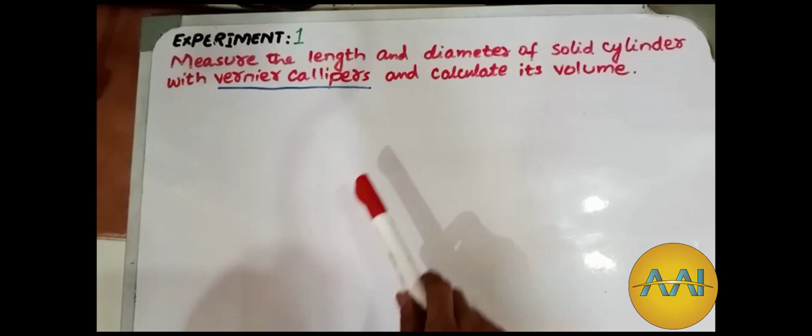First we'll have to learn how to read the scale. There are two scales on a Vernier caliper: one is the main scale and the other is the Vernier scale.

Before starting, we will see how to read the scale on the board, and then we will do it practically with the instrument. As I told you, the Vernier caliper has two scales: one is the main scale, as you have already seen on this board, and the other is the Vernier scale.

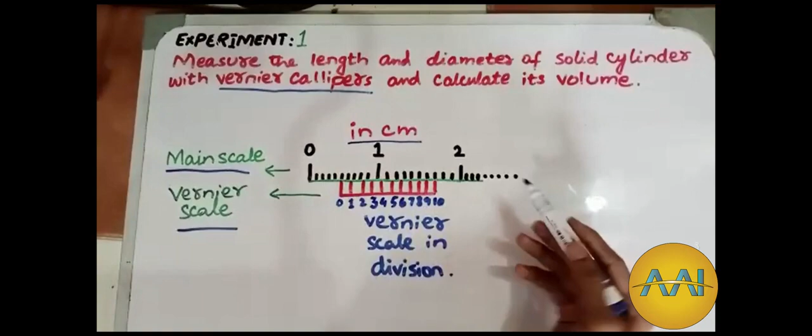The Vernier caliper has two scales. One is the main scale, which is in centimeters, the same scale as in your pencil pouch or geometry box. The main scale is always in centimeters, whereas the Vernier scale has no unit but is in divisions.

It has 10 divisions: 0, 1, 2, 3, 4, 5, 6, 7, 8, 9, 10. Not more than 10 in it.

So how to read this scale? I mean, how to read the main scale: 0, 0.1, 0.2, 0.3, 0.4, 0.5, 6, 7, 8, 9, and then 1. It continues the same way, like 1, 1.1, 1.2, and so on. In this way the scale continues.

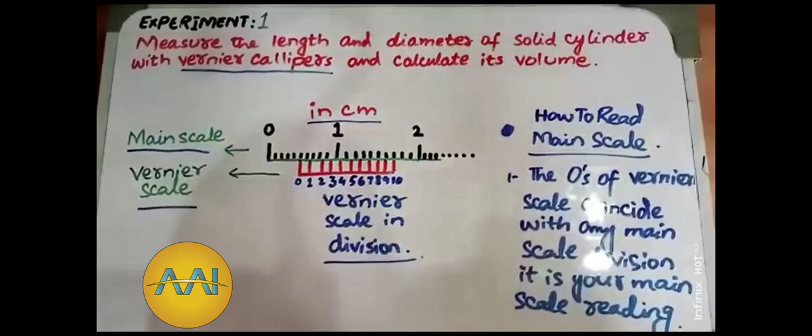So my point is, then how to read the main scale? The rule for reading the main scale is: where the zero of the Vernier scale coincides with any main scale division, that is your main scale reading. Let's see here what I am trying to make you understand.

This red zero, this is the Vernier scale, and the black marking represents the main scale reading. This is the Vernier scale and this is the main scale. The zero of the Vernier scale coincides with any division of the main scale.

This is a division. The one right after zero is 0.1 — this is called a division, this is called another division, and so on. So the zero of the Vernier scale coinciding with any division of the main scale gives you the main scale reading, which I am trying to make you understand.

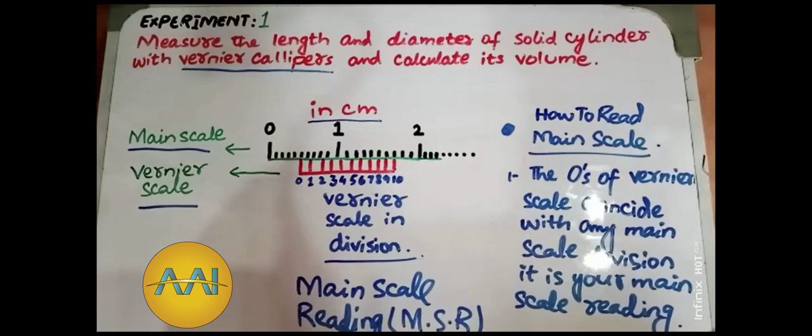So here, what is our main scale reading? Let's try to understand: 0, 0.1, 0.2, 0.3, 0.4, and 0.5, which means my main scale reading is 0.5. So my main scale reading, also represented by MSR, is 0.5 centimeter.

I hope you will understand. So here I have written for you again: main scale reading, also represented by MSR, we have found to be 0.5 centimeter. I hope you are all clear.

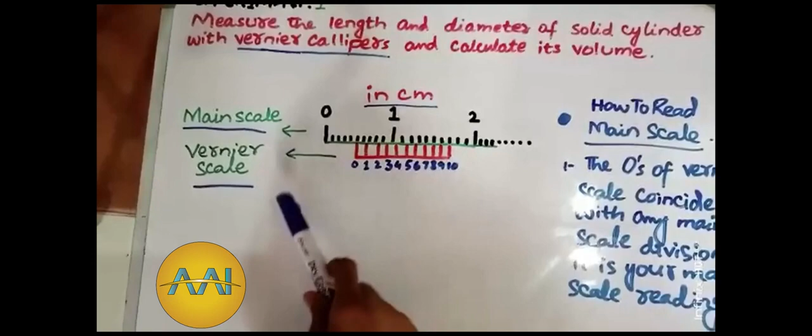So now it's time to read the Vernier scale. The rule of Vernier scale is that one division of the main scale and one division of the Vernier scale, like 0.5 of main scale and the 0 of Vernier scale, both coincide at the same time. That means the Vernier scale reading should be 0.

Let's understand by another example. If any division of main scale and any division of Vernier scale, except 0 and 10, coincide - if 0 coincides with one main scale division, and at the same time 10 also coincides with that main scale division. Look here, like 0.5 is coinciding with 0 of Vernier scale. At the same time, 1, 1.1, 2, 3, 4, 5, 6, 7 - 1.7 is coinciding with 10.

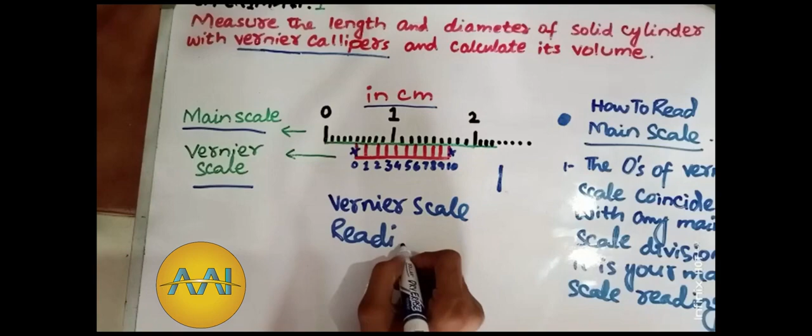Now we are going to do this practical or experiment with the apparatus. Let's begin with the apparatus. I hope you understand up till now. I will now try to make you understand with the apparatus, then we will note all readings and make the observation table in the practical book or practical journal. So here it is - just as I told you, we will perform with the apparatus now.

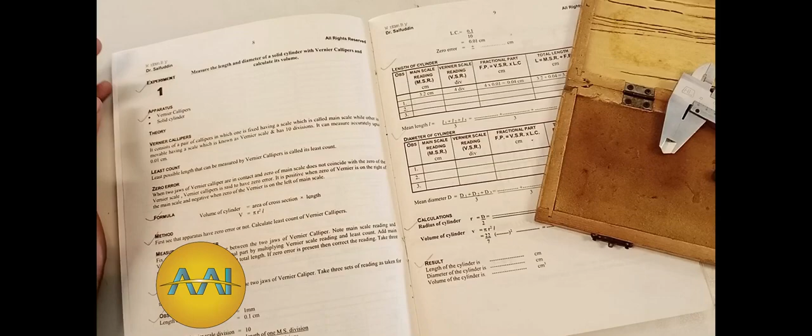So here is our apparatus, which is called the Vernier caliper. Why do we call this apparatus Vernier caliper? Because the scientist or inventor's name is Vernier, and caliper means to caliper something, or to measure something with this apparatus. I hope you are clear and not confused with this apparatus. We will discuss further about this apparatus, but right now I will tell you how to write the apparatus in your practical journal or practical manual.

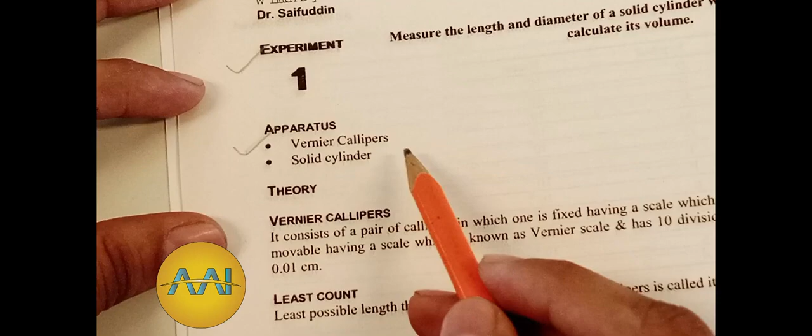So this is the experiment object - this is the object of your experiment, and this is the apparatus, the material required to perform the practical. What is your requirement to perform the practical? One is Vernier caliper, as I showed you - this one is Vernier caliper, this is your requirement, and the other one is solid cylinder. This material is called solid cylinder.

So you don't need to write the theory in your manual or practical journal. Which things do you have to write? You have to write the experiment, you have to write the apparatus. You don't need to write, as I told you earlier, theory you don't need to write. This thing is also not required.

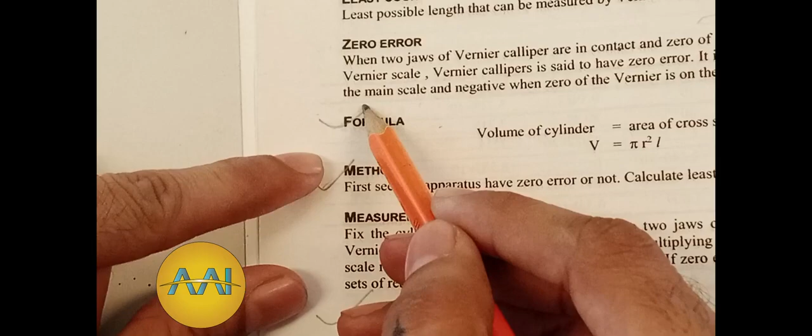You have to write formula, method, and measurement of length, observation, then this formula, length of cylinder with observation table, mean length, then diameter of cylinder observation table, then mean of diameter formulas, then calculations, and after that the last thing is result. You have to write the last thing is result.

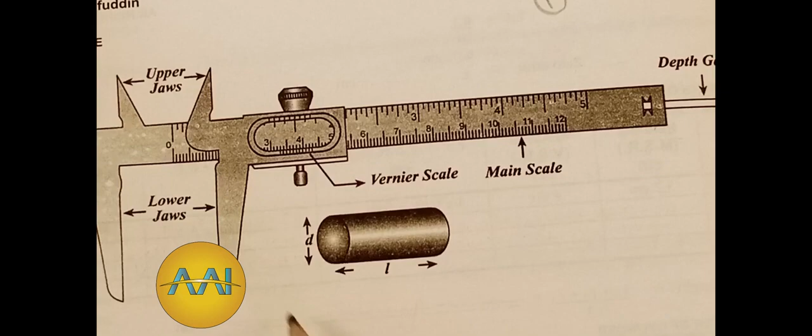One more thing is you have to draw this figure in your practical journal or manual, but this one is not required. You don't need to draw this one figure, you have to draw this figure. I hope you all are clear.

So one more time I am going to read for you: Measure the length and diameter of a solid cylinder with Vernier calipers and calculate its volume.

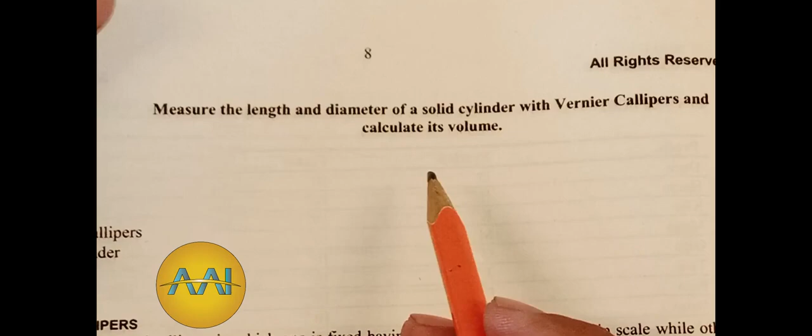So what is our requirement? Our requirement is the Vernier caliper. Yes, we have this apparatus, the Vernier caliper. You don't need to worry about it, I will discuss it with you in detail.

Then the formula. What is the formula? The formula to find the volume of a cylinder is volume of cylinder equals area of cross section into length. We can write this as V equal to pi, which represents area of cross section, pi r square, and after that in multiplication form you write length, which is represented by small l.

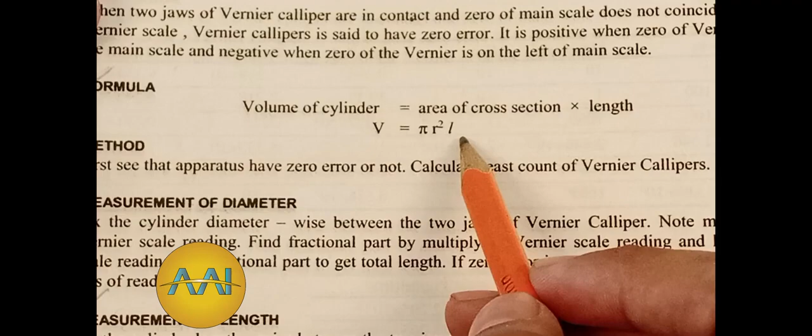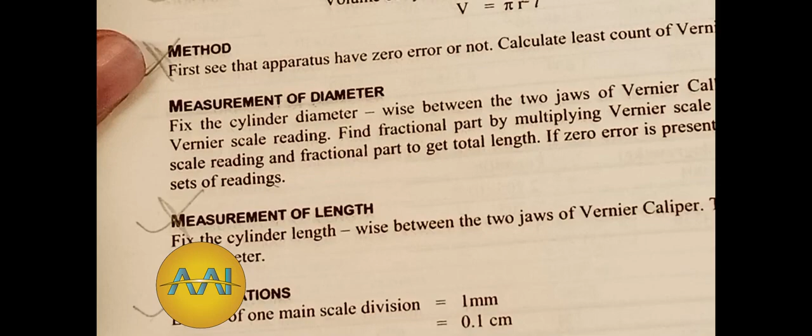You don't need to write the method in your practical journal, nor the measurement of length. One correction I have discussed, you need to note it down. So you have to directly note the observation on a blank page of your practical journal: length of main scale division 1 millimeter. You have to copy this in your practical journal, but don't worry, I will discuss it before discussing the apparatus.

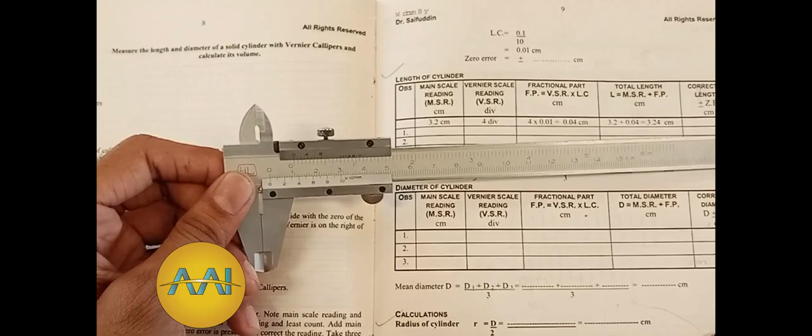So here is your apparatus. First of all I will discuss this apparatus. What kind of apparatus is this? What is the purpose of this apparatus? The purpose of this apparatus is multi-purpose use. The name of this apparatus, as you know, is Vernier caliper.

So what are these things? These are called upper jaws. What is the purpose of these jaws? To measure the inner diameter of an object.

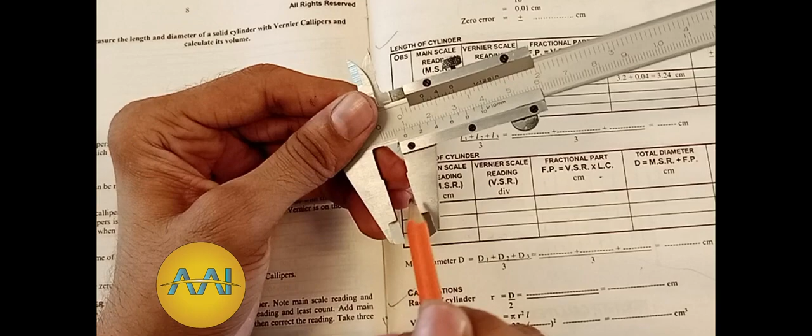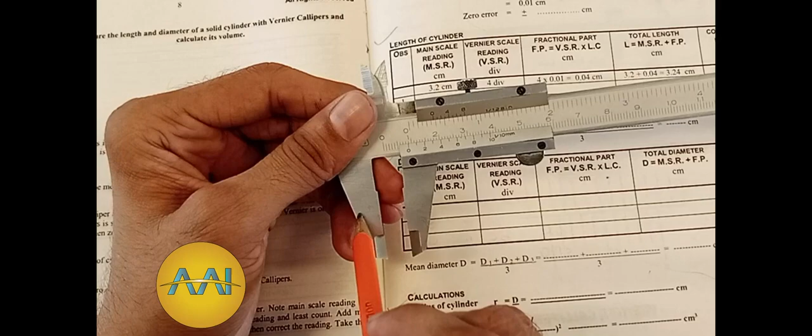In this way, these two things are called jaws, but which jaws? Lower jaws. So what is the purpose of these jaws? The purpose of these jaws is to measure the outer diameter of an object. So the upper jaws measure the inner diameter, whereas the lower jaws measure the outer diameter of any object.

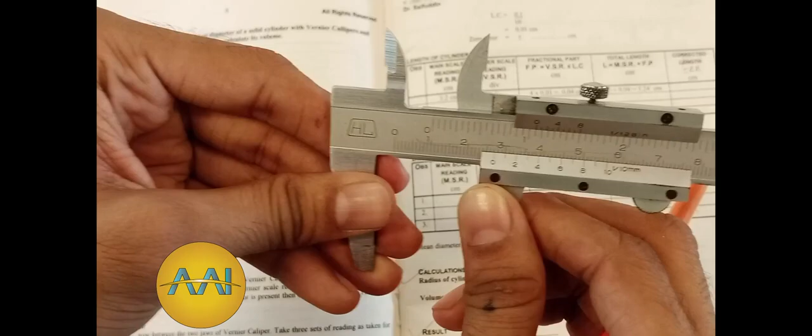So the next thing, this is called the depth gauge. What do we call this thing? We call this the depth gauge, which is measured by the Vernier. As I told you earlier, in a Vernier caliper we have two scales: one is the main scale, the constant scale, and the movable scale, which is called the Vernier scale. The movable scale is called the Vernier scale and the fixed scale is called the main scale.

This is the same as in your geometry box or pencil pouch, this fixed scale, but this is the movable scale, which we call the Vernier scale. And this one is the lock. This is used for locking. When I tighten this screw, the Vernier scale can't be moved. I hope you are all clear.

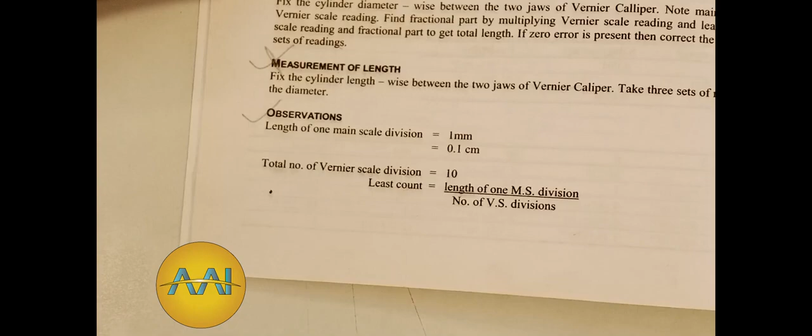So let's move ahead and start with the observation. So what is written here? Length of one main scale division is equal to 1 millimeter. So what does it mean? Is it in centimeter?

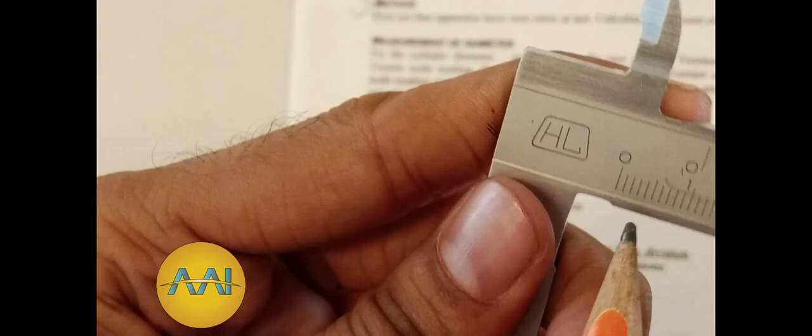So here it is written: length of one main scale division is 1 millimeter. What does it mean? After 0, look here, one division is marked, which means 0, 0.1, and so on. So 1 is in millimeter. Then 0, 0.1, 0.2, 0.3, 0.4, 0.5, 0.6, 0.7, 0.8, 0.9 and then 1. All these divisions are in millimeter.

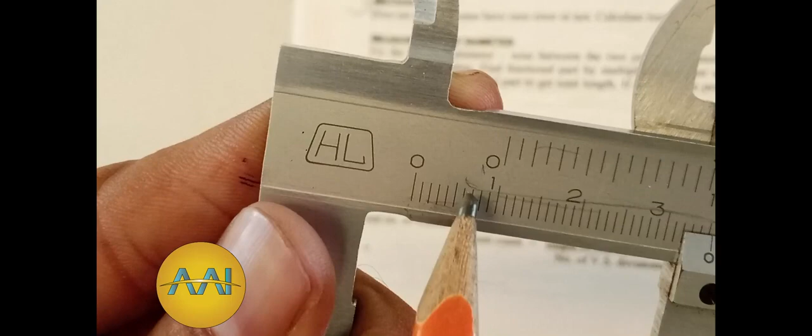If you want your answer in centimeter, you have to divide this by 10. So let's see what is the answer of one division in centimeter. Let's do the calculation: 1 divided by 10, so the answer is 0.1 centimeter. Our answer is 0.1 centimeter, which means we are doing it in a proper manner.

So in the next step they are saying that the total number of Vernier scale divisions is equal to 10. Let's see if they are right or wrong. Let's look here.

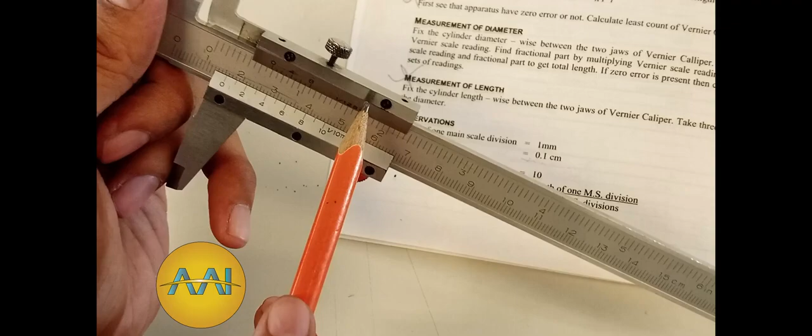After 0, this mark is called 1, 2, 3, 4, 5, 6, 7, 8, 9, 10. We have to follow this scale, the Vernier scale, not the upper one. We have to follow the lower one because we are taking all readings in centimeters, not inches. Therefore we have to follow this one scale, not the upper one. Must remember that.

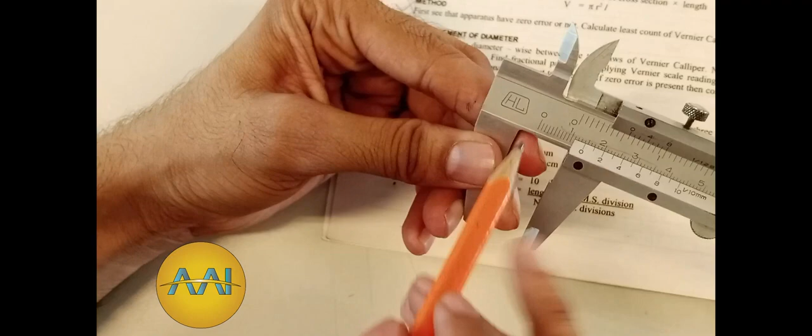There is one more thing written here, that is least count. What does it mean? Least means the least value which you can count. Mostly people make a mistake: when asked what is the least count of any instrument, they say 0. You are right, but you can't count it. After 0 you can count any other measurement like 0.1. So 0.1 is the least count of the main scale or Vernier scale which is readable. After 0 you can read or count 0.1, which means the least count of the Vernier caliper is 0.1.

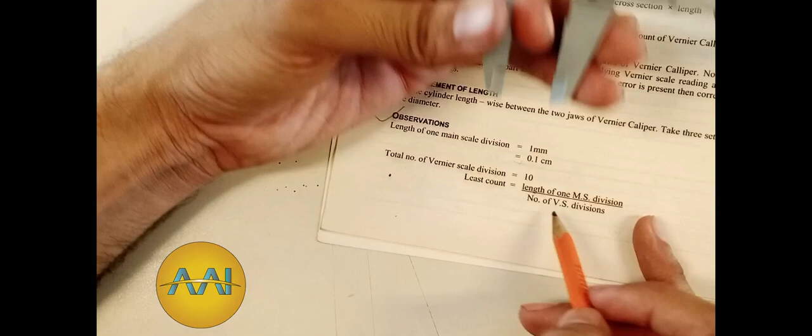Then, length of one main scale division divided by number of Vernier scale divisions. MS stands for main scale, whereas VS stands for Vernier scale. So for least count, we have a formula. What is the formula of least count? It is the length of one main scale division divided by the number of Vernier scale divisions.

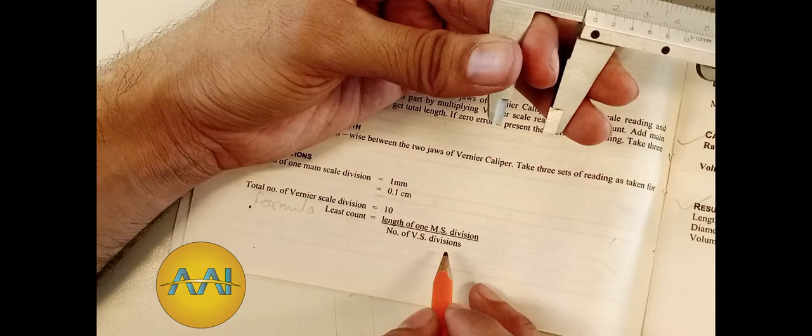How many divisions do we have on the Vernier scale? We have 10 divisions on the Vernier scale, whereas on the main scale we can count 1 division. We can count it here: 0, 0.1, which means the formula of least count is main scale count 0.1 divided by the total number of divisions on the Vernier scale. Here it is 10, so 0.1 divided by 10, so the least count is 0.01 centimeter, when you take the ratio of 0.1 and 10.

So one more thing: here is a term used, zero error. You must remember that every instrument has error. Here I have a question: how many types of errors are there? I hope you learned this in your class, so please answer in the comment section what kinds of errors there are.

Which one? One is zero error. Zero error is of two types: one is positive error, the other is negative error. So every instrument must have zero error or error, but in our case I have removed this error for you, for the sake of saving our time.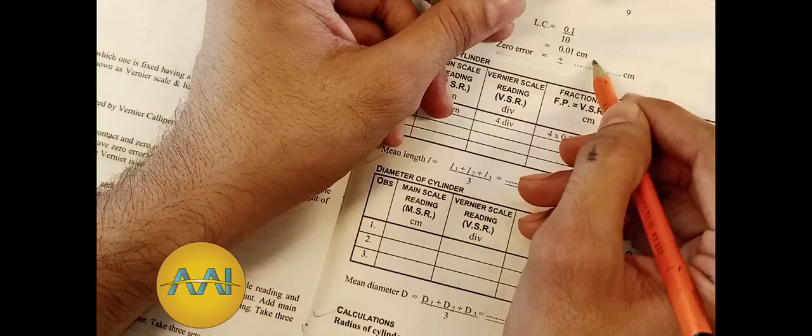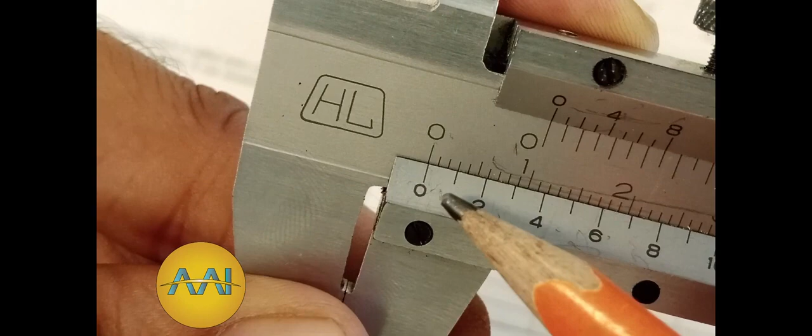So how do you find whether our instrument has zero error or not? You can find it this way: if your Vernier scale 0 and the main scale 0 are not coinciding with each other, that means there is zero error. But right now we don't have zero error in our instrument because I have removed it for you, for the sake of saving our time.

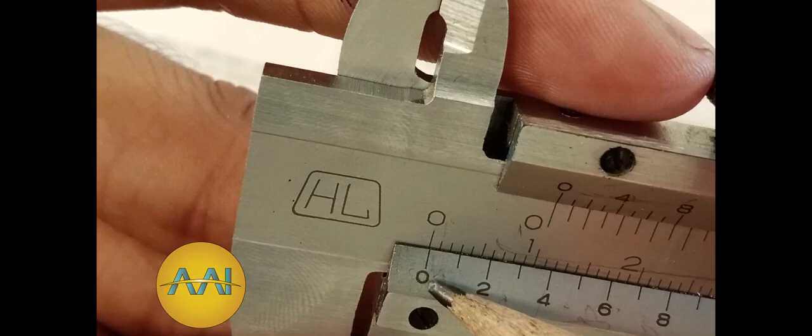So if there is any error, let's suppose there is positive error. Our Vernier scale 0 is not coinciding with this 0. So where is it? Then this 0 comes after the main scale 0. Then in case of negative error, what will happen?

The Vernier scale 0 is again not coinciding with the main scale 0. Then where is it? The Vernier scale 0 is coming before the main scale 0, which means there is negative error. In both cases, if you find positive error, you will...

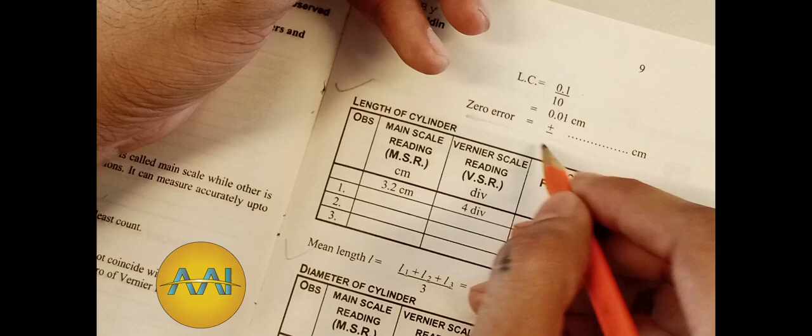...subtract the divisions in positive error. When it is negative error, you will add the divisions in negative error. In this way you can remove zero error from your observation, if you find any zero error in your apparatus. But in our case I have already removed it for you for the sake of time, so what we will write here is 0, because in our case there is no zero error. So therefore I have written 0 here.

Length of cylinder, you have to draw this complete observation table on your blank page of practical journal. Let's see what are the observation table headings.

So total length is of what? Length of solid cylinder. Total length L is represented by L. L equals MSR plus fractional part. MSR reading plus fractional part reading, both adding, which is equal to total length.

In the last column, we don't note this column, because in our case we don't have a zero error in our apparatus, as you know. Therefore we don't make this column.

So in your case you have a zero error, so you have to draw this column. As I told you, if you find a positive error, you have to subtract the reading from your total length. If you find the negative error, you have to add the reading to your total length, then you write corrected length. Otherwise, if you found the error and don't do this thing, your reading will be wrong.

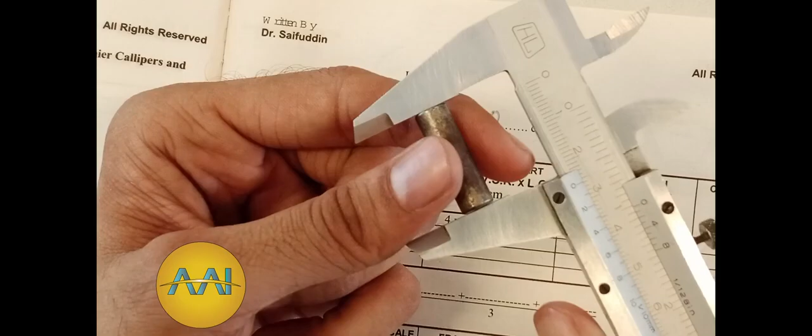You have to take this solid cylinder and fix it between the lower jaws. Then you have to screw tight, because you can handle it without any resistance or problem. You have to fix it between these jaws and then screw tight in this way. Therefore, you cannot face any kind of problem.

Now you have to read the scale. What scale? One is main scale and other one is vernier scale. You have to read both scales. How to read? I have told you in our starting video. Let's do it again.

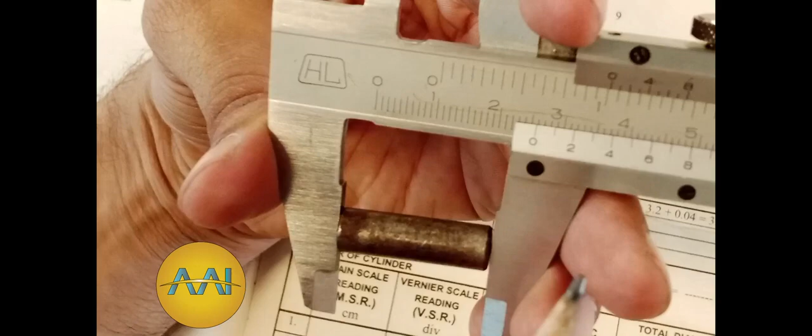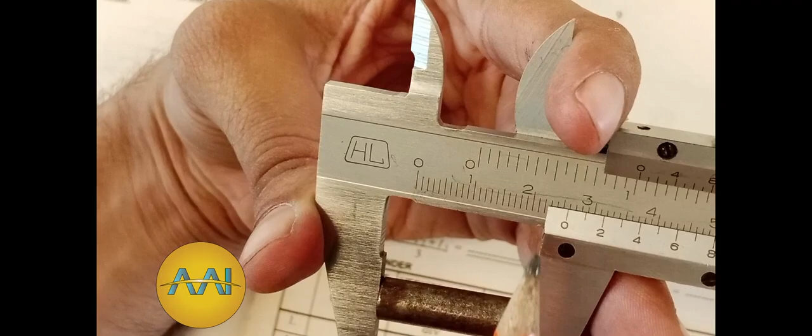Read it again. The vernier scale 0 is coinciding with a main scale division. If vernier scale 0 is coinciding with any division of the main scale, so what is our reading? That is our main scale reading.

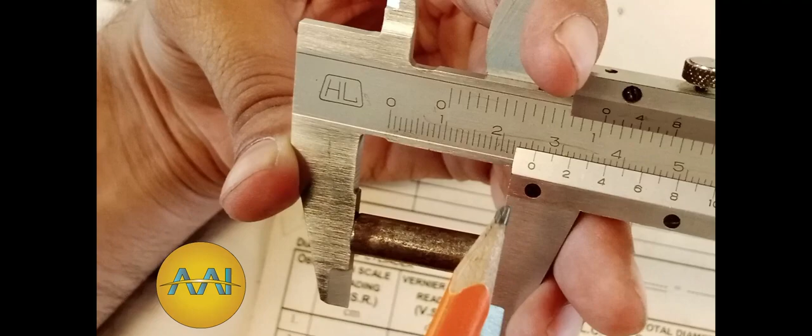It is not necessary that you also find the same reading, because it depends on your instrument. Every instrument has a different reading, so you don't need to worry if my reading is not the same as yours. But if you follow the same method, you will find the correct reading. It actually varies with the instrument, it depends on the instrument.

So in our case, 2.6 is the main scale reading. One more thing, if you find the main scale reading is 2.6 for the length, you must remember that the whole time you have to perform this reading 3 times. So you must remember that 2.6 never changes for this scale.

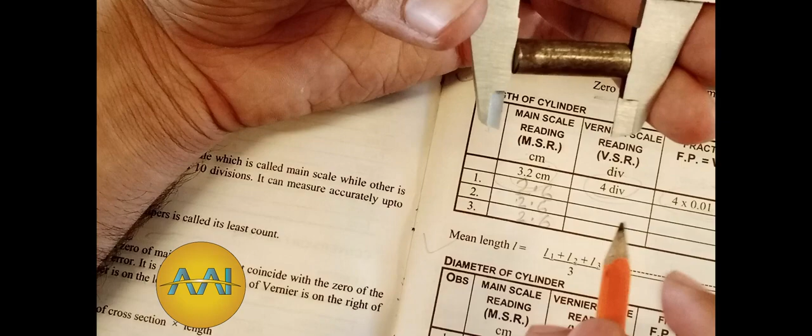But the vernier scale can be changed or cannot be changed. Sometimes it changes, sometimes it doesn't change. It depends on the material. Let's see what I am trying to make you understand.

So when you find the length, you will write 2.6 three times, or however many times you have to perform the reading. If you find the main scale reading 100 times, the main scale reading will be the same for 100 times. So if you want to verify that, you can check, no issue at all.

So we have found the main scale reading. Now it's time to find the vernier scale reading. Make sure that we have found the main scale reading in decimal form, 2.6. But it is not in vernier scale.

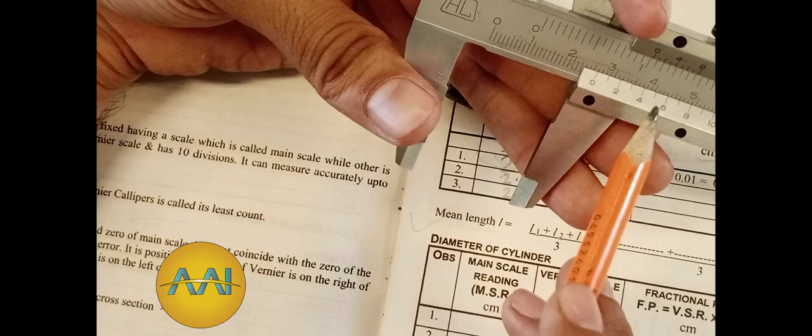In vernier scale, the reading will be found in constant form, not in decimal form or fraction form. So don't worry about our solid cylinder being released from this vernier caliper, because I have tied the screw, therefore the vernier scale reading is fixed.

So let's find the reading for the vernier scale. I have told you the best coinciding value is the reading of the vernier scale.

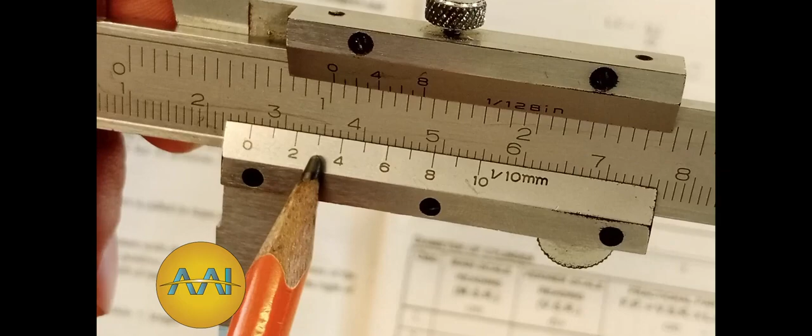Let's look from 0. 0 is coinciding with any division of main scale, which means that 10 is also coinciding. So in our case 0 and 10 are also coinciding, therefore we have to see another reading except 0 or 10. So 1 is not coinciding, 2 is also not coinciding, 3 is not coinciding, 4 no it is not coinciding, 5 no, it is also not coinciding, 6, 7 no. But in our case 8, here what a coincidence.

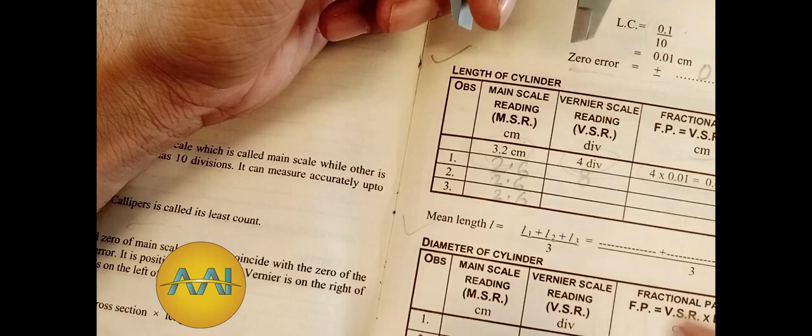In the starting video I have taken 4, but in our case the vernier scale reading is also 8. So here I write 8, okay, but not any unit. It does not have any unit. It is in division form, 0 1 2 3, you can count, not in decimal form. So you have to write 8 divisions.

Now come again. You have to fix it again as I told you earlier, and you have to tighten the screw. No worry if it's released from the vernier scale, because our reading is fixed by this screw. So it happens sometimes.

So what is the reading of vernier scale on main scale? Let's see, look at here, it's fixed again at 2.6. As I told you earlier, it is fixed for the whole time. Then what is the reading? Before taking the main vernier scale reading, I told you it's sometimes changed or sometimes not changed.

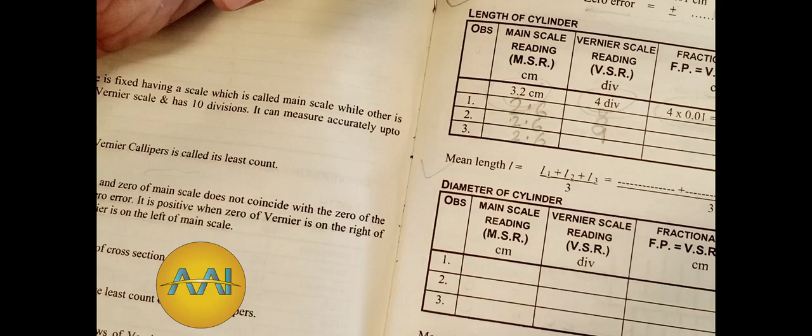So look here, either this time it's changed or not. 0 is coinciding, which means that 10 is also coinciding. So except both readings, you have to note another reading. After 0, 1 is not coinciding. 2, 3, 4, 5, 6, 7. Oh, 7, 8. Okay, this time 9 is coinciding, 8 is not coinciding properly. So you have to perform this reading again. In this way you can find the third reading.

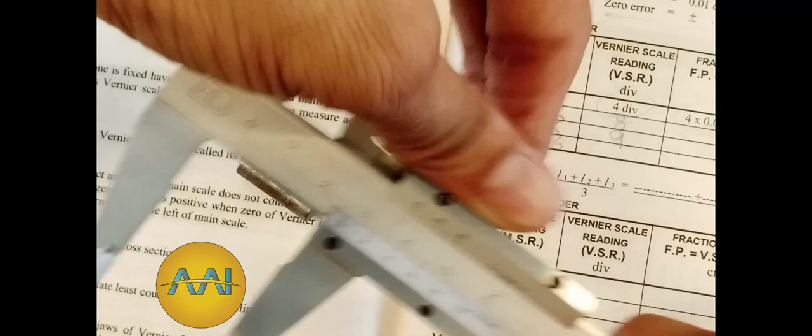Okay, now I am fixing it again for the vernier scale reading. So here I am fixing the solid cylinder and tightening the screw. No worry, it happens. But again you can see that our main scale reading is constant, which is 2.6. I have already written our vernier scale reading: first reading 8, second 9.

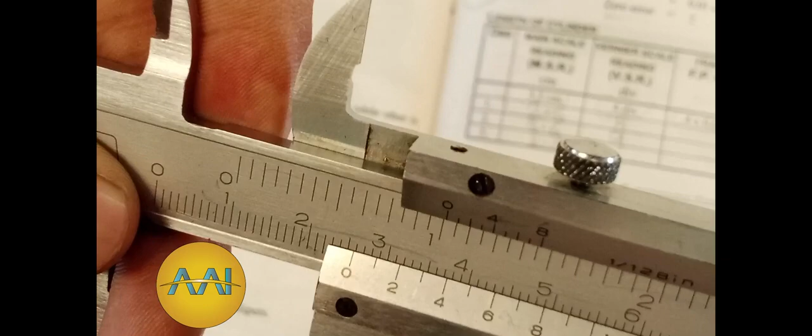Now you can see that 0 is coinciding, 10 is coinciding. Now, except these two readings, 1 is not coinciding, 2 3 4 5 6 7 8 9. This time 9 is not coinciding, but 8 is coinciding. It happens, the reading can repeat.

Okay, so you can write it again. Don't worry about my reading repeating, whether I am performing right or wrong. You are performing right, okay, you don't worry about this. So reading can repeat or can't repeat, sometimes it happens, so don't worry about it.

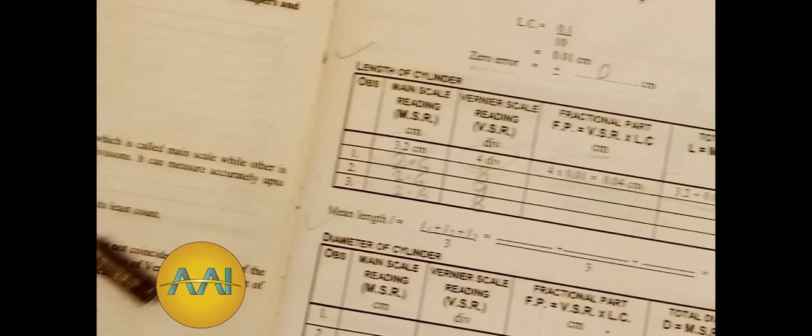Okay, now it's time to calculate the fractional part. How to calculate the fractional part? They are giving us the formula: fractional part is equal to vernier scale reading multiplied by least count. So fractional part is 8 in our case. Vernier scale reading is 8 multiplied by least count. What is least count? In our case 0.01. So 8 multiplied by 0.01.

To find 8 multiplied by, which means 8 is vernier scale reading multiplied by least count. What is least count? 0.01. So what comes out? 0.08. 0.08, centimeter unit is already written, therefore I am not writing it here. If you want to write it you can write centimeter, but once written, you don't need to write it again. Now 9 multiplied by least count, which means 0.09 centimeter. 8 multiplied by least count, 0.08 centimeter.

Now it's time to find the total length. The formula of total length is main scale reading plus fractional part. What is our main scale reading? 2.6. 2.6 plus fractional part. What is our first fractional part? It is 0.08. So 2.6 plus 0.08 is equal to 2.68, because here both readings are repeating.

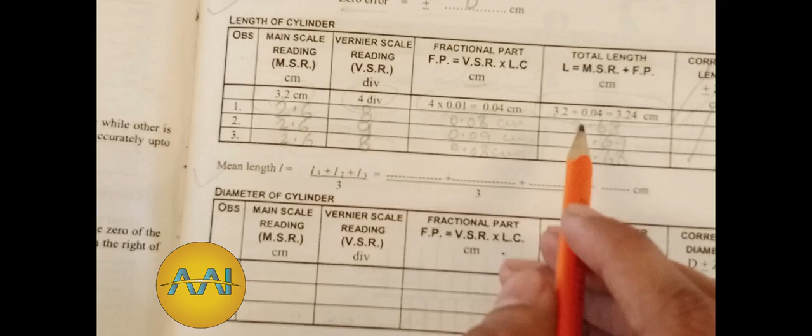So this is our L reading. You have to find mean length, which means the length column in the table. So length 1 is 2.68, second length is 2.69, and third one is 2.68. Now it's time to add these three readings.

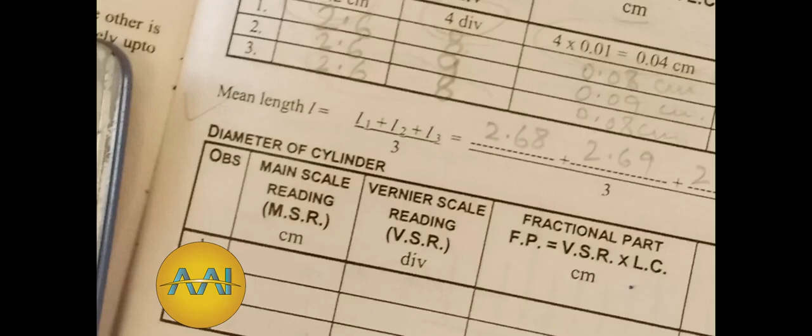What is our first reading? 2.68 plus 2.69 is the second reading. Now the third and last reading is 2.68. This is equal to 8.05, and the last step is to divide these three readings by 3. So now I am dividing 8.05 by 3. So the answer is 2.68. I hope it is clear up till now.

Now it's time to measure the diameter of the cylinder. How to find the diameter of the cylinder? It is quite easy, just like measuring the length of the solid cylinder. So let's start with the solid cylinder.

To measure the diameter of the solid cylinder, you have to fix it in this way between the jaws, specifically the lower jaws. You can fix it like this, or you can also fix it like this. Wait for a while, you can fix it this way. It's up to you, in both cases you can find the diameter of a solid cylinder.

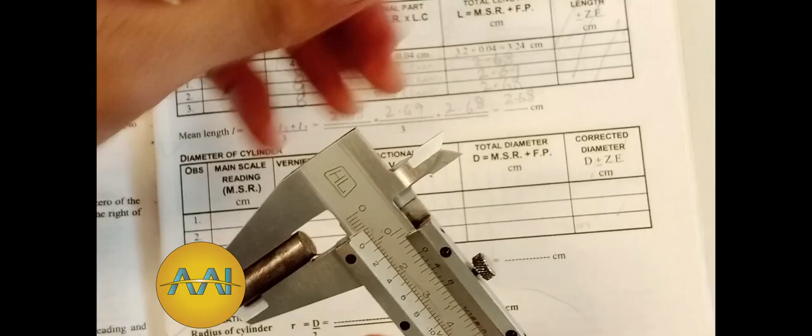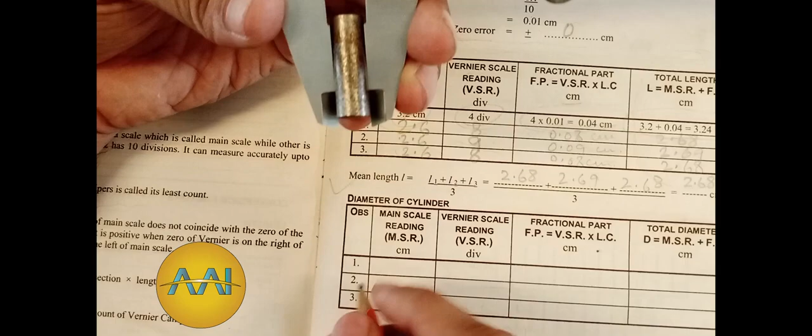You must remember all the rules. As I told you, once the main scale reading is taken, it will remain the same for all readings. So how to read the main scale reading? You read it where the zero of the vernier scale is coinciding with any division of the main scale. So here is 0, 0.1, 0.2, 0.3, 0.4, 0.5, 0.6, 0.7, 0.8. In our case, the main scale reading is 0.8, which means this reading stays the same throughout the diameter measurement of the solid cylinder.

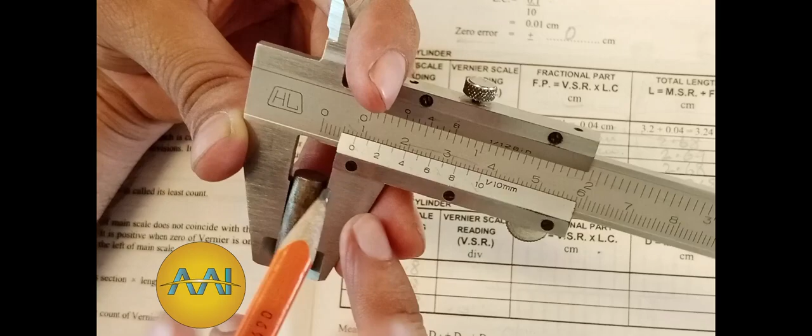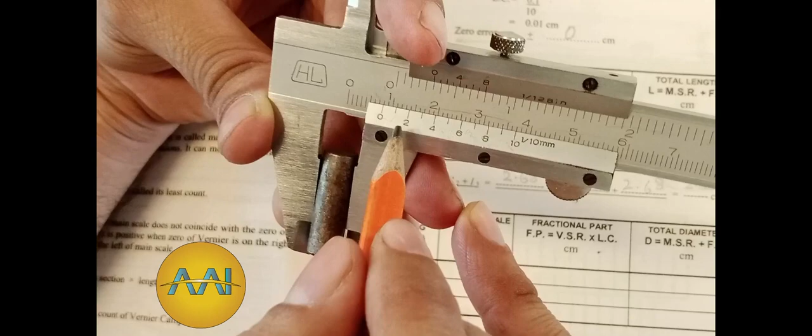Now it's time to measure the vernier scale reading. How to measure the vernier scale reading? You now know well that the best coinciding value is the vernier scale reading, the one where the main scale reading and vernier scale reading coincide best. So 0 is coinciding, which means 10 is also coinciding. Let's check again: 9 is not coinciding, 8 is not coinciding, 7 is not coinciding, 6 is not coinciding, 5 is not coinciding, 4 is not coinciding, 3 is not coinciding, 2 is not coinciding, but 1 is coinciding. You can see here that 1 coincides with the main scale division. So I am taking the vernier scale reading as 1.

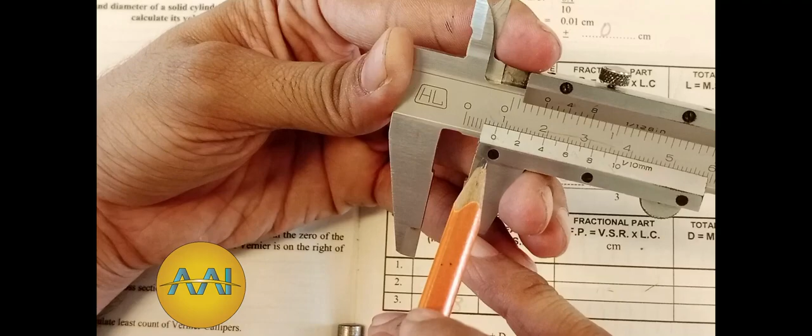For the second reading, what do I have to do? I have to loosen it from the vernier scale, fix it again, tighten the screw from the top, and take the reading again. Since I already know the main scale reading will be the same, I am not looking for the main scale reading now, but focusing on the vernier scale reading. So 0 is coinciding and 10 is coinciding. After 0 and 10, which one is coinciding? 2 is not coinciding, but wait, 1 is coinciding, 2 is not. 3, 4, 5, 6, 7, 8, 9 are all not coinciding, but 1 is coinciding. Therefore, I am again taking the vernier scale reading as 1.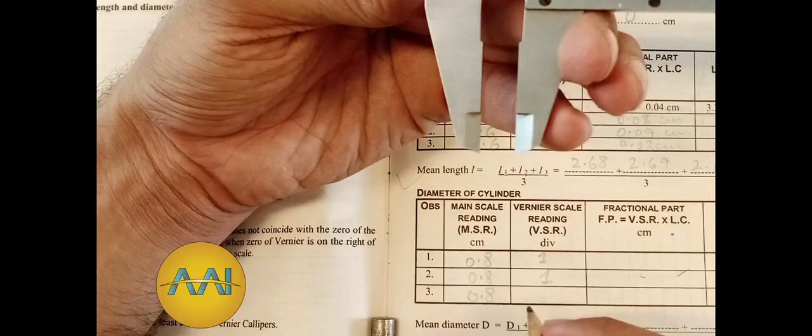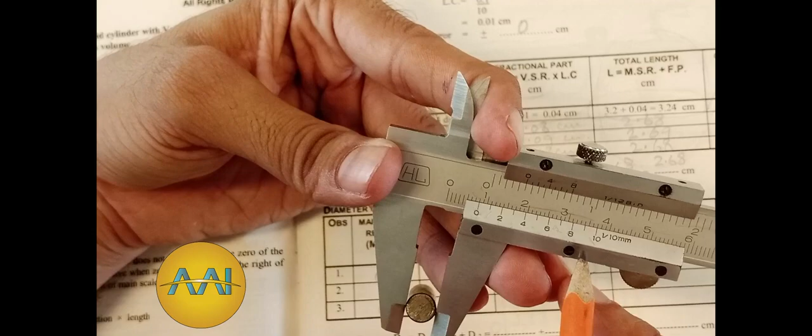So again I am loosening the screw and fixing the solid cylinder to determine its diameter. Now I am tightening the screw. Again I am not focusing on the main scale reading because I know it will be the same, that is 0.8, so I am focusing on the vernier scale reading. 0 is not, 1 is coinciding, so 2 is not coinciding, 3, 4, 5, 6, 7, 8, 9 are not coinciding, but 1 is coinciding. So I am taking 1 again as the vernier scale reading.

I hope it is clear. This can happen, as I told you earlier, the reading can be repeated sometimes and cannot be repeated other times, depending on the instrument. So don't worry about this repetition, these readings are the same. Now you can find the fractional part. I hope you know how to find the fractional part: fractional part equals vernier scale reading multiplied by least count. So what is the vernier scale reading?

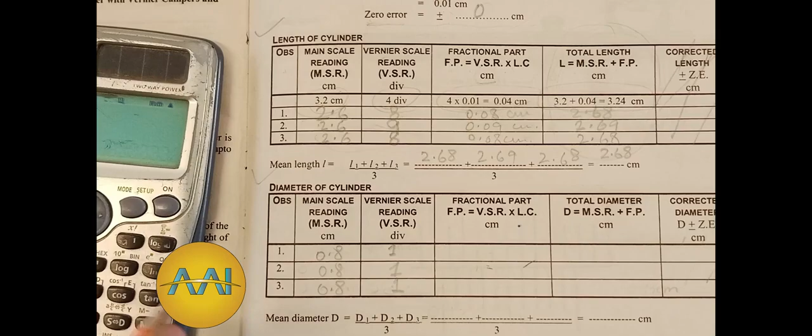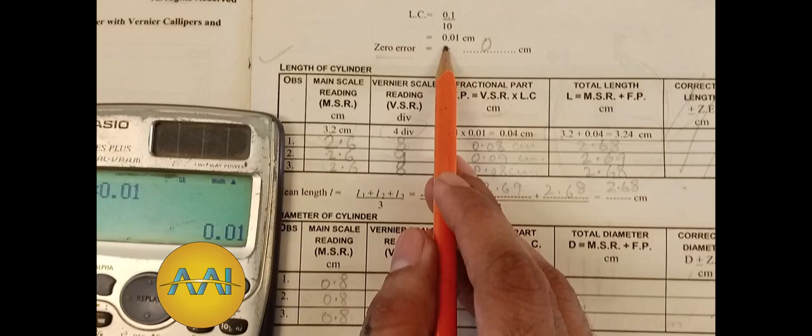The least count is 0.01. So 1 multiplied by 0.01, you will find the fractional part reading is equal to 0.01. It's a coincidence because anything multiplied by 1 comes out the same. So the least count is also the same, 0.01. So you don't need to worry, it is same for all.

Now it's time to find the diameter, total diameter. Diameter is equal to main scale reading plus fractional part. What is our main scale reading? Our main scale reading is 0.8. So 0.8 plus the fractional part, which is 0.01. So 0.8 plus 0.01, our reading is 0.81, which means the diameter of the solid cylinder is 0.81.

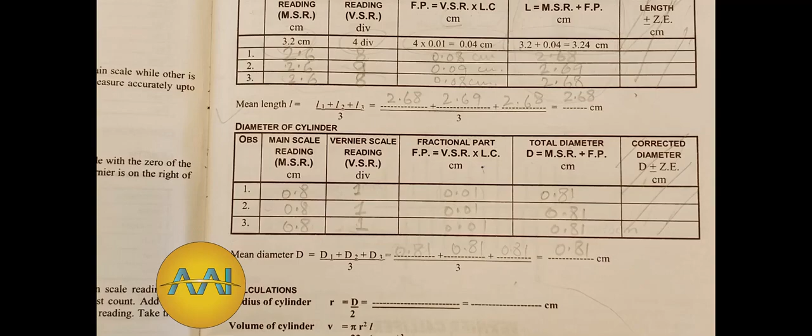In our case there is no zero error, therefore we will not draw the column of corrected diameter. Now we have to find the mean diameter. The formula of mean diameter, capital D, is equal to D1 plus D2 plus D3. This is D1, this is D2, this is D3. Write down 0.81, 0.81, 0.81. When you add these three readings and divide by 3, you will again get 0.81. You can calculate it for your own knowledge.

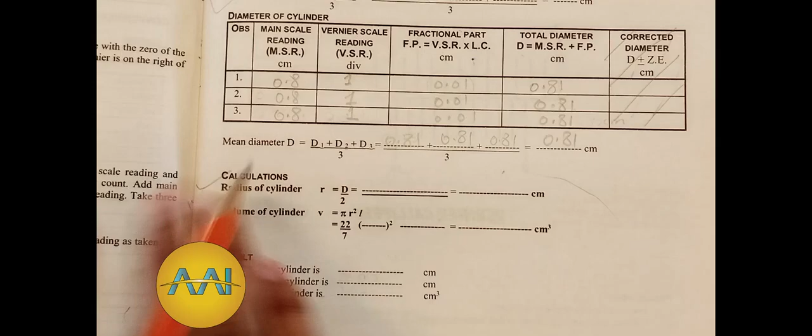Now I am going to find the calculation. It is the most important part of the practical. You have to perform it for gaining marks. As I told you, it is about 8 marks.

So here you have to find the radius of the cylinder, but in our case there is no radius given directly, but we know that the formula of radius is half of the diameter. We learned this in earlier classes. The half of the diameter is called radius.

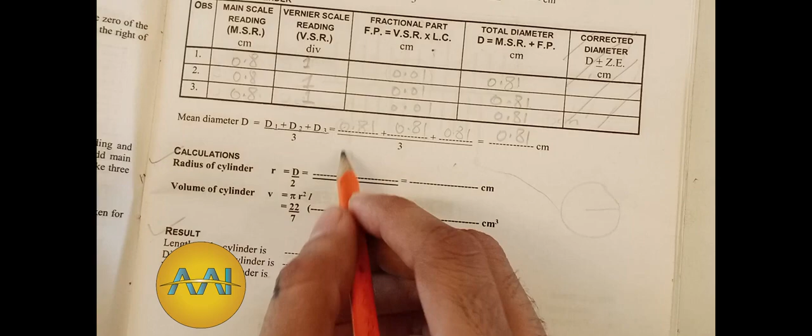So diameter's half is 0.81 divided by 2. So 0.81 divided by 2, then you will get 0.405. Now it's time to find the volume of a cylinder.

The formula of volume of a cylinder is V equal to pi, which is constant. I will tell you the constant value of pi. Right now let's move ahead. The formula of volume of a cylinder is V equal to pi r square L, where L represents the mean length of the solid cylinder. The value of pi is 22 upon 7.

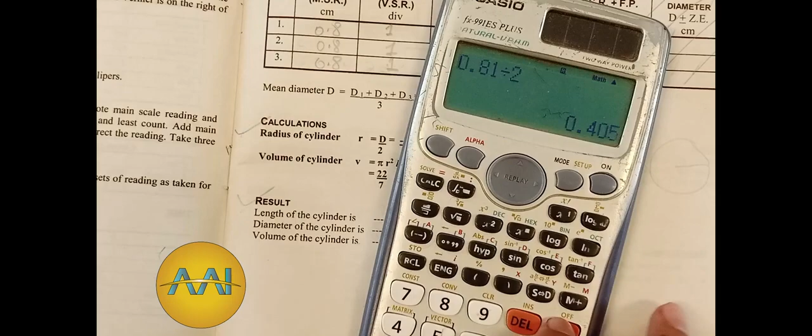What is r? What is the value of r? We found that 0.405. So we will write 0.405 square, so we have to find the square of 0.405. Then you will get the answer, 0.405 square is 0.164.

You don't need to write the whole value of this. You can write only 2 digits, because the least count of the Vernier caliper is 0.01. After the decimal value you take 2 digits. Therefore here we can also take 2 digits. So I am writing 22 upon, the square of 0.405 is 0.16.

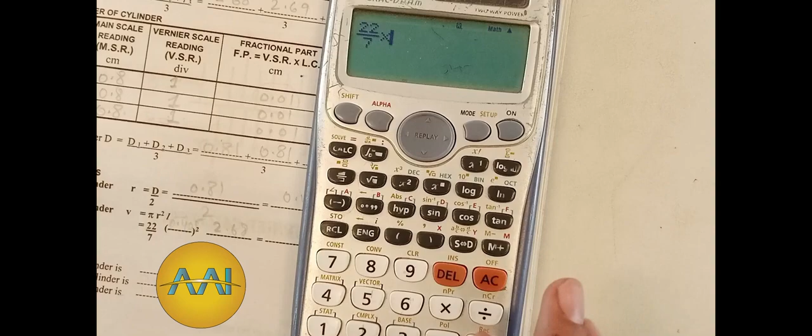Then the mean length is 2.68. Now I am multiplying the whole value: 22 upon 7 multiplied by r square value, which is 0.405 square, which comes out as 0.16, multiplied by 2.68. So the answer is 1.347, which means that the volume of the solid cylinder is 1.347.

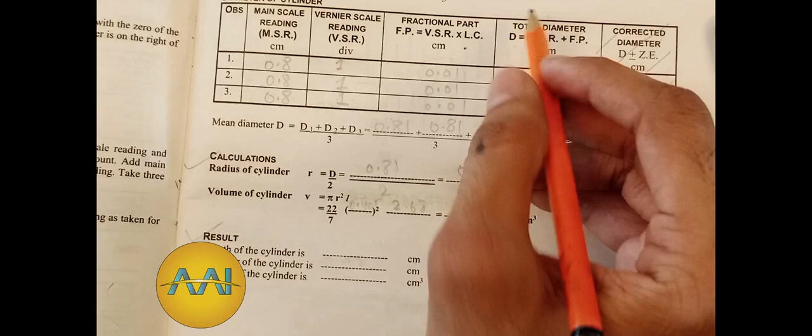Now the time to write the result. Length of the cylinder, you have found 2.68. Note down here 2.68. Now what is the diameter of the cylinder, it is 0.81. Note down here.

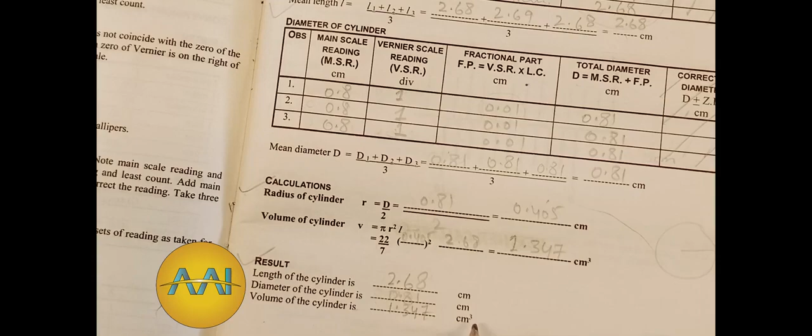0.81. Now the last thing, what you have found, the volume of the cylinder, so the volume of the cylinder is 1.347, in centimeter cube. You must remember that length is in centimeters, diameter is also in centimeters, but volume is in centimeter cube. So here is our apparatus reading, and we have done our first practical, alhamdulillah.

So in this way, if you note this, I hope you will be clear and understand the whole reading.